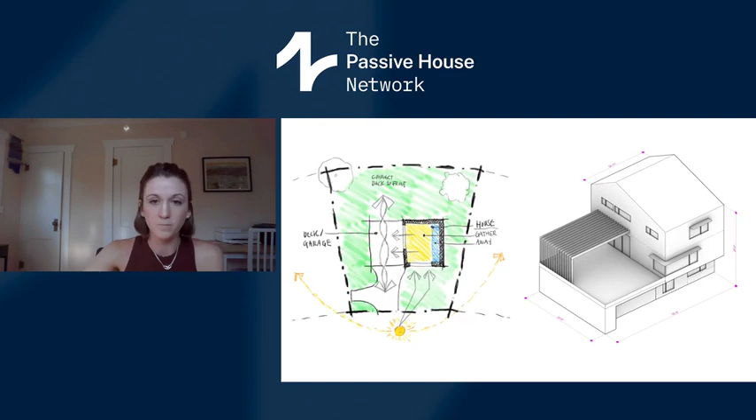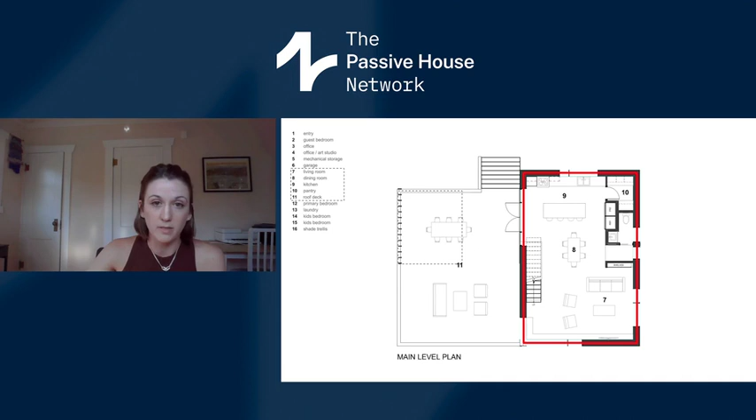This is the main level plan. This is the plan where that south and west facing glazing really comes into play. It allows heat to come into the main central area of the house in this open living, dining, kitchen space, and also provides access to the exterior here.

Okay, so one example of a collaboration that we had with BldgTyp when we were designing the windows, we discussed the layout with them, and they suggested that we make two changes to our design. One, they wanted us to reduce the north-facing windows by a tiny bit, just to reduce the energy loss through the north. And two, they made it a point that we needed to keep the west-facing trellis shade structure to reduce the amount of unwanted heat coming in through the west side.

And normally there's this push and pull between wanting to frame mountain views in these mountain towns, and then also placing windows strategically to optimize passive solar. But this project, I feel, is really unique in that its site was perfectly arranged to have both.

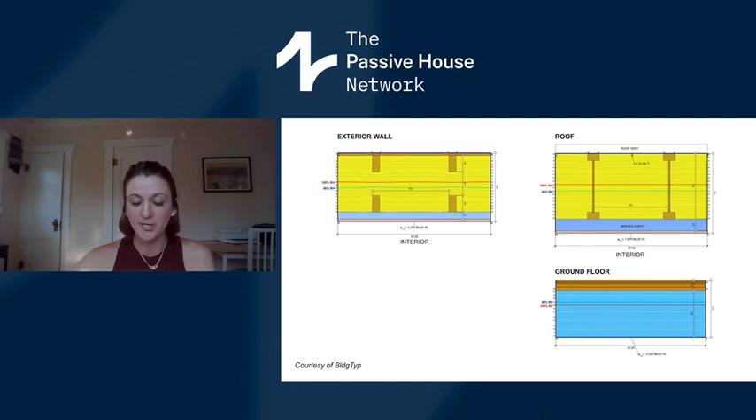And because the Louisville Building Department had never seen this before, they actually flagged it in our permit review, at which point our structural engineer, who is also well versed in passive house design, stepped in and advocated for it to get it approved, and it worked. We call it a slabless slab, and in addition to reducing material embodied carbon, it also has a higher R-value than a concrete slab, coming in at R43.7, but with a strength of 25 psi, it's plenty for supporting residential functions.

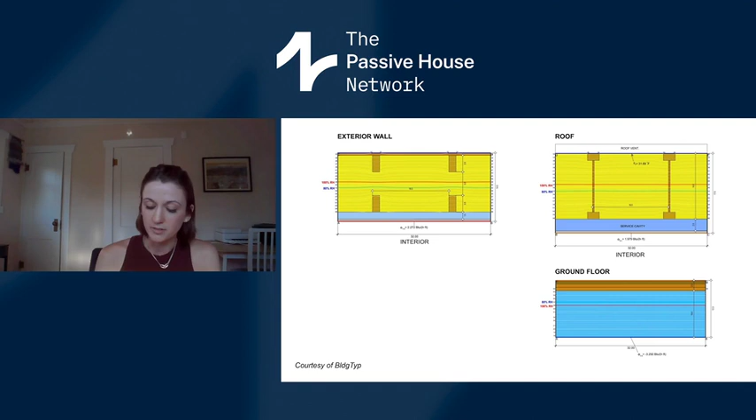So since this lot was constrained in size and the budget was tight, we opted to not pursue PHI Classic after we determined that it would add enough cost to sort of negate any increase in performance.

And then very quickly, before I hand it off to Frank, we had the challenge of detailing windows set in concrete, but in a way that would prevent thermal bridging. We originally had the window jamb set sort of horizontally in line with this concrete stem wall here, so the owners would actually have sort of a shelf on the interior.

But when we shared that detail with BldgTyp and they did an isotherm analysis, we learned it would be at risk for condensation. So after several discussions with both BldgTyp and Living Craft, talking about our options through the lens of what's actually buildable, we figured out that we could solve this issue fairly simply by just moving the window further in towards the insulation. And that's graphically represented by this isotherm.

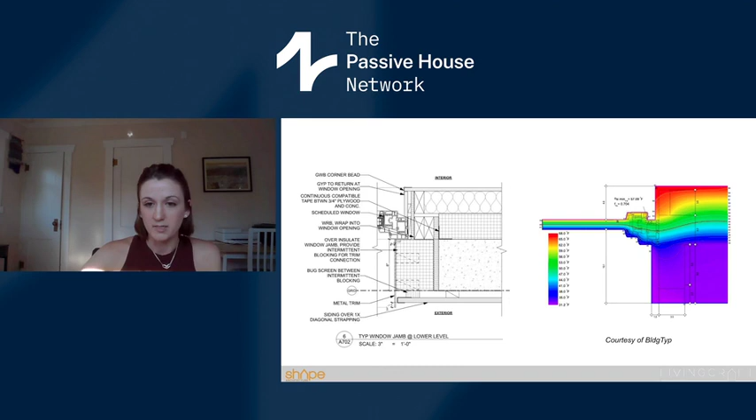And with that, I will go ahead and hand it over to Frank to present some of the lessons learned during construction. Thanks, Maggie.

Yeah, it's been a really great collaborative experience, and most of the lessons we're learning are similar to standard construction. It's just the details are so much more important, and first and foremost, it's having those meetings ahead of time.

In particular, something that I wish I had done a little bit earlier was getting the architect, engineer, passive house consultant, and builder all in the same room to run through the plans for an extended period of time, just because someone draws a detail slightly different than someone else, and then in the field, we have to figure out what's buildable. So spending a little more time on that, I wish I'd done that.

But so far, things have gone well, and when we do run into questions, those RFIs turn around pretty quick. One thing that we did as builders was we started marking up the drawings just to wrap our minds around it, and also so that we can relay some of this information back to the designers and the passive house consultant, and also to share that information with a lot of our subs.

And that's another thing that was even more important on these types of projects: getting your trade partners through early and figuring out where are we going to put that radon stack? Where are we going to put the vent through the roof? How are we going to run our line set? How are we going to air seal all these penetrations for the ERV or hose bibs or whatever they may be? Figuring out all those things early and getting them on board for this whole really tight envelope idea was really critical, and finding people who are open-minded to that was also really critical.

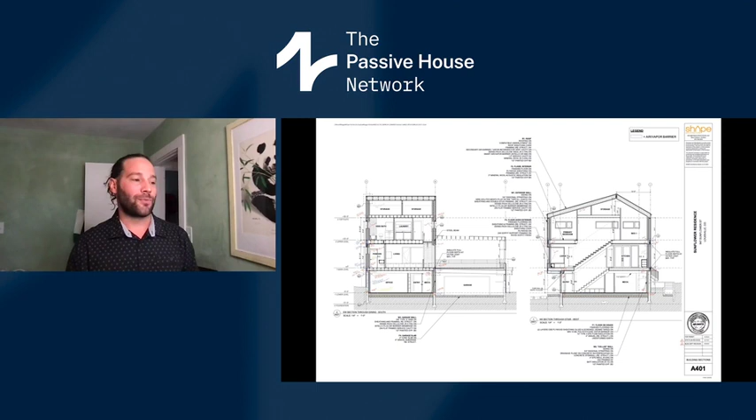So this slide is just where I went through and marked up all the details, all the different products I was using. I also met with the supplier; they're kind of like an air sealing consultant as well. I used 475 Building Supply for that, so they helped me develop this. I met with the framer, we revised it even further. And then when you get into the field, a few of these details change as well.

But even so, then you get in the field and you're like, oh, how would I actually fold this thing to connect this other thing? And so it's always a little tricky, but so far we've done well with it.

For a lot of our goal with this was kind of trying to do more of a low carbon build. And so anytime we can avoid some of the higher embodied energy materials like spray foam, we did. So most of this above grade is dense packed cellulose. So for that, we did a double stud wall with service cavity, as Maggie mentioned.

And so we're using a lot of membranes, a lot of tapes. And so the details are a little tricky sometimes and take a little time. And so something else I would definitely recommend if someone is new to this is whatever you think your air sealing numbers are going to be, increase them. And then whatever your material takeoffs you think you're going to do, like order more tape. Because there's always things that you're like, oh, I should tape that too.

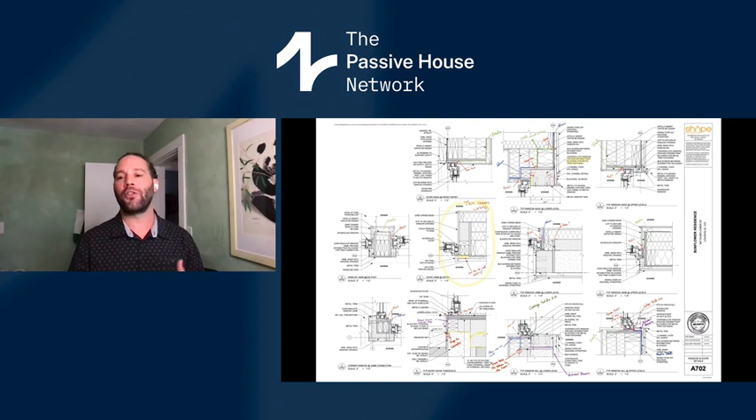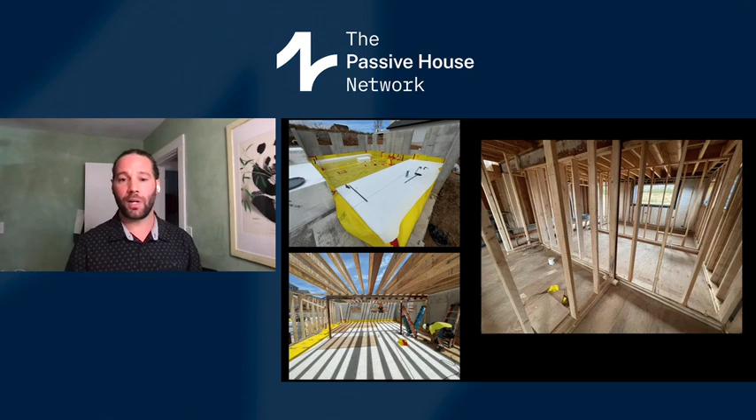And now it feels really solid, pretty level. And so it should work out well. It's new for us, but I've always wanted to do it. So that vapor barrier wraps up and connects to the inside of that foil-faced foam. And that foil-faced foam is now our air barrier to the interior. That's 4 inches of foam directly on the concrete.

We insulated to the interior of the concrete for various reasons that I won't get into, but you can kind of see that with the window bucks. And then in that top left photo on the right side, it's that same wall on the bottom, which is a double stud wall that is on the same wall as the garage. So we kind of have a little bit of a transition there.

You can see the double stud wall on the right side, that's 12 inches. You can see that blue tape is kind of wrapped underneath the 2x6 wall, which is our structural wall. That's all just kind of connecting the air barrier at every lap. So the details on this project are a little funky because we're trying to do it foam free.

And so when you have a cathedral ceiling, but you want to do dense packed cellulose and you are worried about condensation, you kind of go about it 2 ways. And we did basically both of those ways, which is you have a really robust interior air barrier so that in theory, you don't ever have warm, humid air getting to your exterior sheathing and condensing there. Or you can vent to the exterior. And that's basically what we did.

So we have an air barrier to the underside of the TJIs, which you'll see in the next photo. But essentially, just imagine you have your cathedral ceiling, air barrier underneath them, and then on top of that, we have this Mento, which is doubling as the netting for the insulation, but also kind of like a WRB. And then there's a 1.5 inch vent above that, kind of like a rain screen that you would do on the exterior of your walls. And then your sheathing sits on top of that.

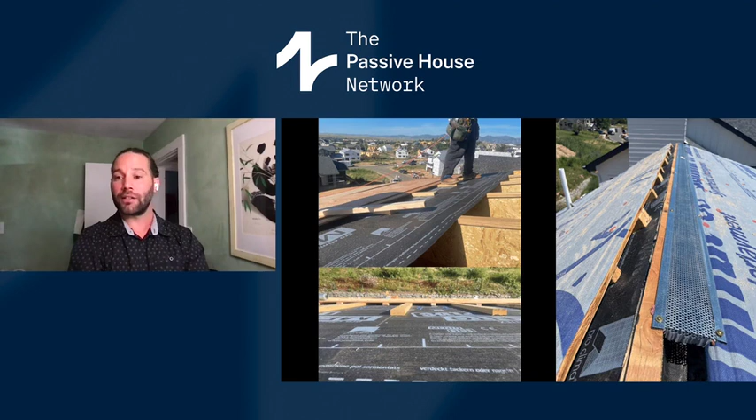But there's a lot of layers there. It's not the most straightforward solution. Granted, we're still doing this pretty cost competitively, so things were learned. It's still simple in terms of construction. It's just a lot of layers. And so you can see this is that third floor. That's the Intello on the bottom side of those TJI roof rafters.

We do a service cavity basically everywhere just to fish wires and have slim can lighting and switches, outlets, all that kind of stuff. Just to keep all those things to the inside of our air barrier. That way, the fewer times we have to poke through that, the better. The less taping we have to do, the less chance for failure. And the nice thing about Passive House low energy is we only have to get below 1. I'm hoping we get way below that, but I guess we'll see where it turns out.

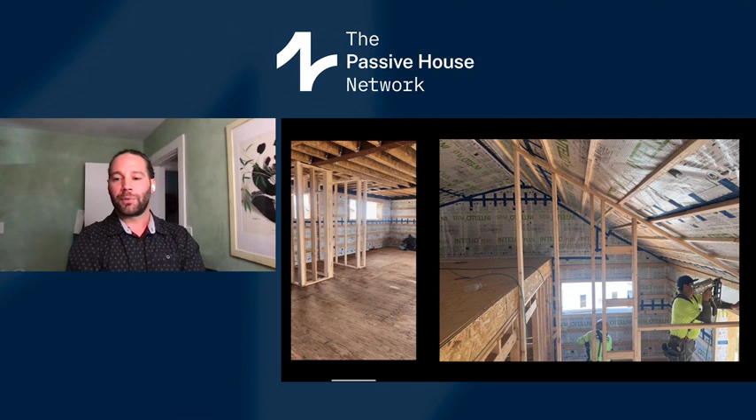We have windows coming in next week, and then we'll do a little preliminary blower door to see where we're at. And then the exterior is basically just wrapped with a WRB. It's a vapor variable WRB. It's Mento from 475. And then we're doing a vertical rain screen and metal siding. Again, the metal siding was another choice for a little bit of fire durability.

The one thing we learned on the vertical strapping: I had done diagonal strapping before, but for vertical, in order to land on your studs, you really need to stack your studs from floor to floor, which we did not do. So we ended up going back to the engineer and being like, what screw do I need to use and what spacing do I need to use if I'm not going to a stud? So things like that you learn along the way.

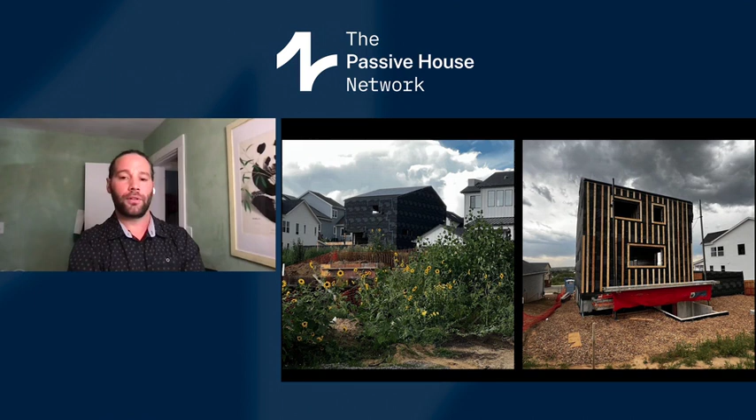You'll notice that the vertical battens, as they come up to the windows, are held off. That's just to allow air to move around as it goes up, that stack effect. And then we also have Vulcan vents at the bottom that act as the bug screen and fire screen, just to prevent any embers from going up through that vent and causing that chimney effect and bringing fire through. And that's kind of it.

I think from our point of view as a builder, our values really line up with the designers at Shape, Maggie, and then the clients as well. The high performance, the low carbon, the healthy materials, that's kind of our jam. And so this is a really great project for us. We're really excited about it. Ultimately, as on any project, we're worried about budget and performance and comfort, resilience, health, durability, all those things. And so I think that Passive House lends itself well to all those things. But having a good team, coming up with a good system is super important. So anyways, that's all I got.

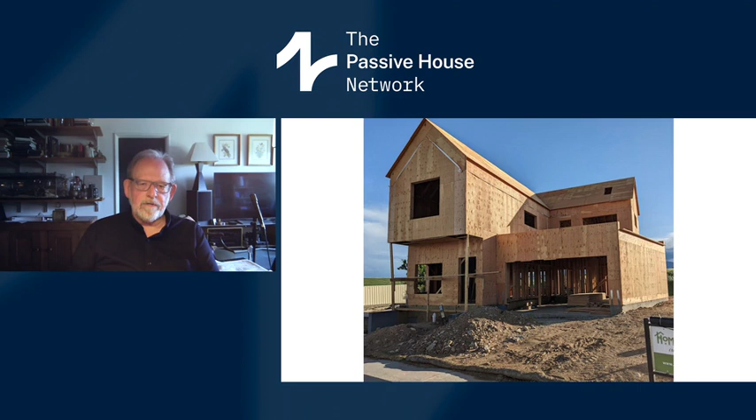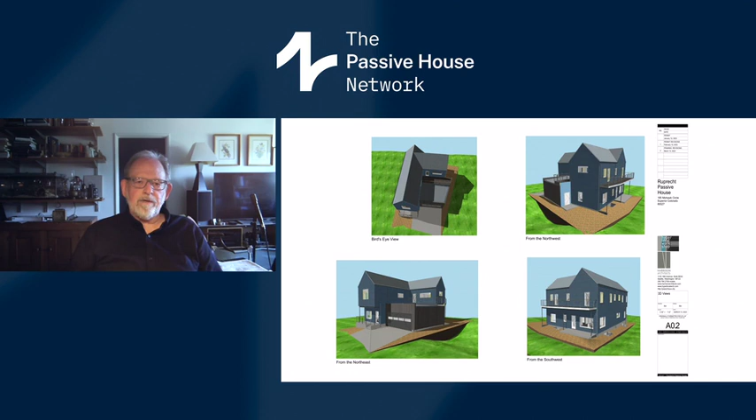I'm going to show a little of this, the ArchiCAD model. So we're basically looking at it with the siding that Peter and Michelle chose. So basically you can go to the plan. In this case, the north is up. This is east over here. There's another house on the north, another house on the south. So on the ground floor, it was a wedge-shaped lot, so we could expand the size of the garage a little bit. And this is unusual in that it has a basement as well, and then second floor.

Andrew and I worked really closely with Chuck through the design process to come up with systems that would be both economical and meet passive house. Like Sunflower, we're doing wood stud walls, except that we're doing 2x8s with 2 inches of mineral wool on the outside. The mineral wool was chosen because of its fire resistive properties, and then rain screen, and then fiber cement on top of that. And then a metal roof, which Chuck will speak to later.

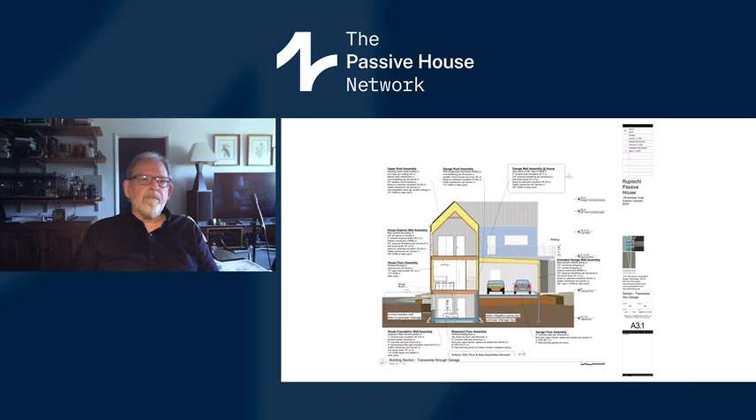So basically we've got blown-in cellulose in the walls here, and another thing that I looked really carefully at, might say obsessively, is the spacing of the studs, this is the advanced framing grid here, the stack framing, to make sure that they lined up from the foundation to the roof, and then the studs lining up with that too. Chuck suggested that we use deep floor joists, open web, to give us room to run the utilities and so on in the floor space of both the first and second floor.

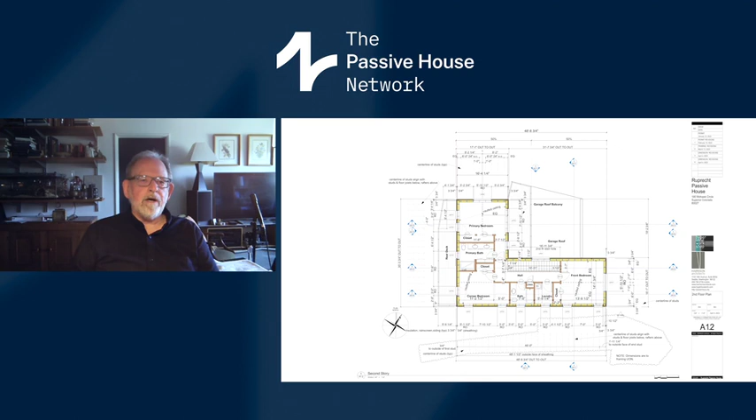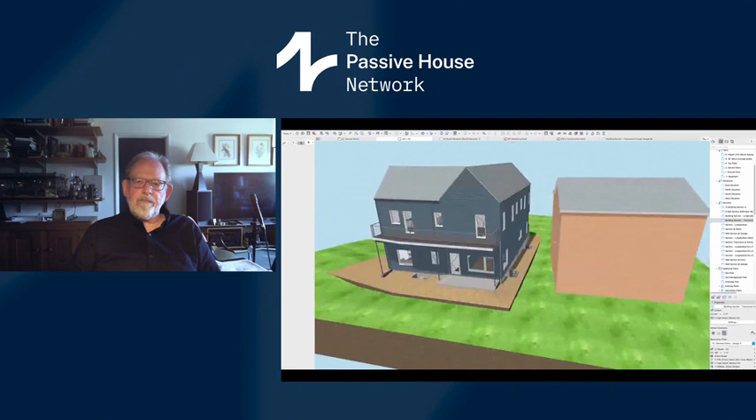Let's see what else. Go back to the 3D here. Like Sunflower, like most houses in the area, the view is to the west. So we partly mitigated the heat gain with a continuous deck off the west side of the structure. And we were lucky in this case that because of the pie-shaped lot, we had a little bit more space in between the two houses, so we could get some more glazing in on the south side. The north remains fairly low on windows, which is something that's different from what we need in Seattle.

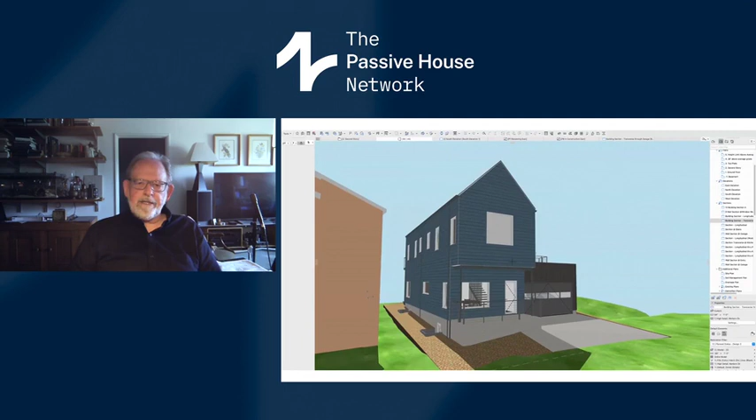I think I will turn it over to Chuck, and I can jump in if there are any other questions at the end. Thanks. Thanks, Rob. I think that's a pretty good high-level view of what we're trying to achieve.

The biggest challenge that we had going into this is that we wanted to check all the boxes, not only be passive house, but WUI compliant. So that drove a lot of our exterior materials. The decision was to try to have everything non-combustible outside of the WRB. And so all the decks are steel with aluminum deck boards, steel railings, cement siding, and standing seam metal roof on this. So that was the challenge. We also wanted, like Rob said, to introduce advanced framing to this, and at the same time, try to make it more affordable for clients that were coming up short on their insurance claim.

And so that was kind of a tall order. It took us months and months to finalize the plans. We're still value engineering out in the field and coming up with the best ways to do this. I did want to highlight that with the metal roof, and it's funny that Frank and Maggie went into this on their project.

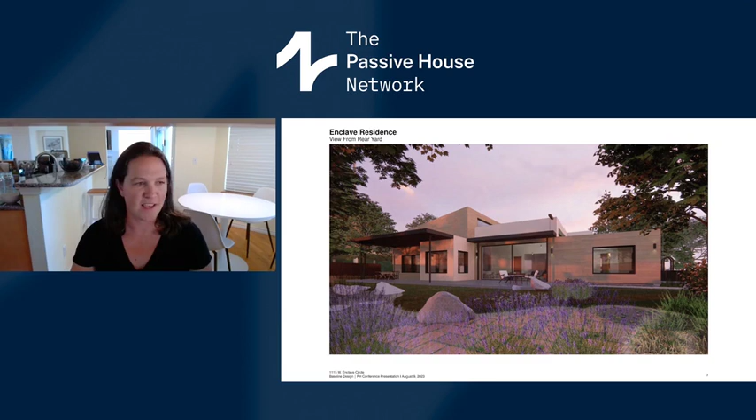And this is it from the rear yard. So behind us is Davidson Mesa, for anyone who's local and knows. And behind that, just unobstructed mountain views. So obviously the driving goal is to get big, huge, awesome views out the back. And then a few views inside, renders currently, but we're looking forward to when these will become photographs.

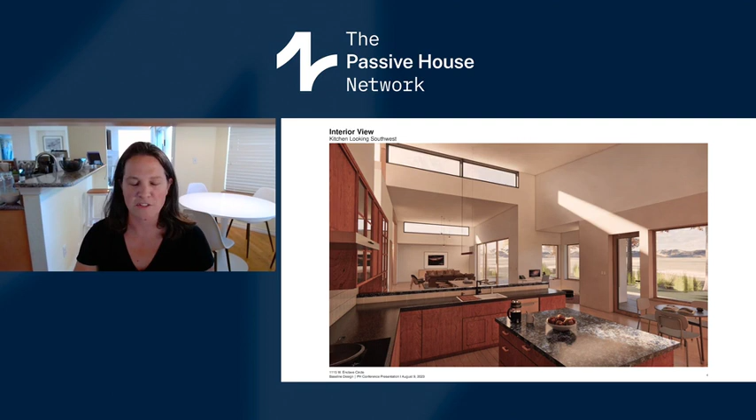So on the right-hand side, that's the view out to the west with the mountains. And then we also have this idea of these tiered southern clerestories to take advantage of southern light and just flood the house with lots of natural light. Just click through a few more views. This is the main entry.

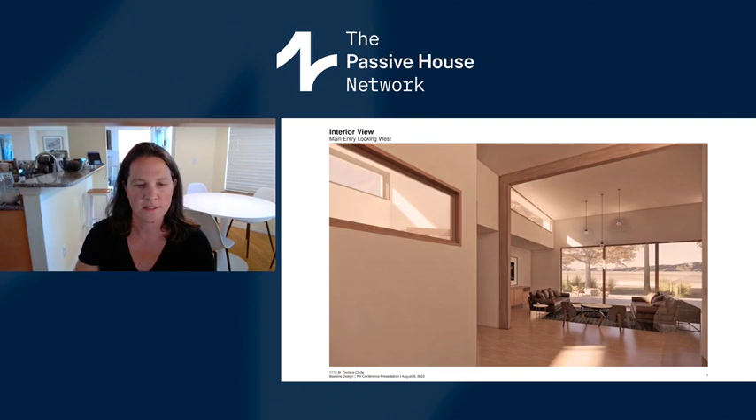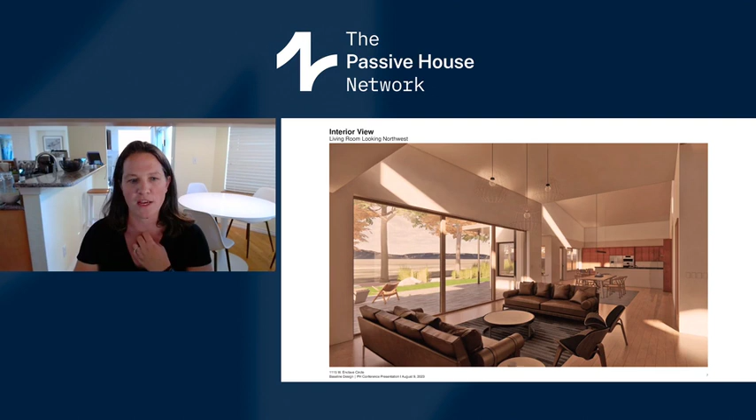So coming into the house and looking directly out the west. Coming in a mudroom door from the garage, through the house you get, again, an immediate western view. And then here the main open living space just from the other side. So living room, kitchen, dining.

So we thought we would pick a few specific design considerations. What do we have to do differently to design this house because it's passive? And then more specifically, talk about using a prefabricated system like B.Public, which is what we used. So the large 14-inch thick Lego blocks that come on site and go up really quick. We can tell you what we've learned and takeaways from that.

So I've had a lot of people ask, is there a lot more planning, more detailing, more coordination for a passive house? And I have not found that to be the case more than any other custom home, but I have found it to be much more front end loaded. So by the time this was going in for permit, it's really dialed in with all the players, from the details to the systems to everything.

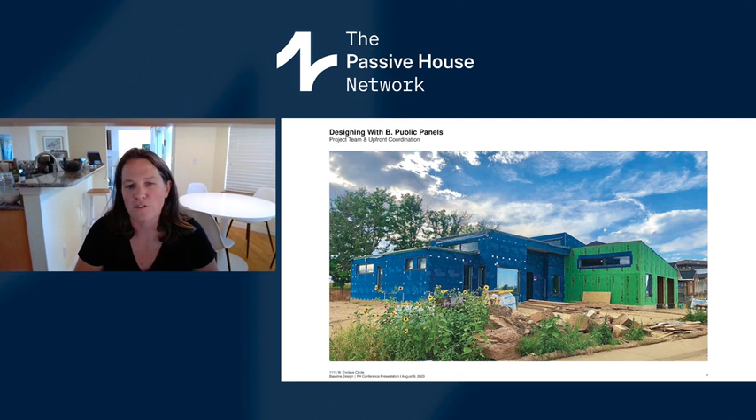And then the process of construction is much more execution of those than as much figuring out as I'm used to. So it's good. It's a good microcosm or good practice for any project. But I would say that for sure is one thing we've learned, just how crucial that front end coordination is. From getting a great team with lots of expertise and just caring about it and lots of passion, and then just getting that much farther along before you're starting construction.

And just generally, this is a diagram we did really early on showing the layers from the plan to the panel components in the middle and then the cladding on top. And I think what I'd say as a takeaway is we didn't feel limited by it. Going into it, I thought that we would. We thought there would be a fair amount of design concession for performance. And we really haven't found that to be the case.

It's a parameter for sure, but I would say the plan, which initially came right from the owners, is really close to what they wanted. All the light, all the windows, really close to what we would want to do anyway. So we feel super encouraged by that. And I think that's like a nice nugget to be able to pass along to people thinking of doing it. This doesn't box you in or limit you, just changes a little bit how you think about it.

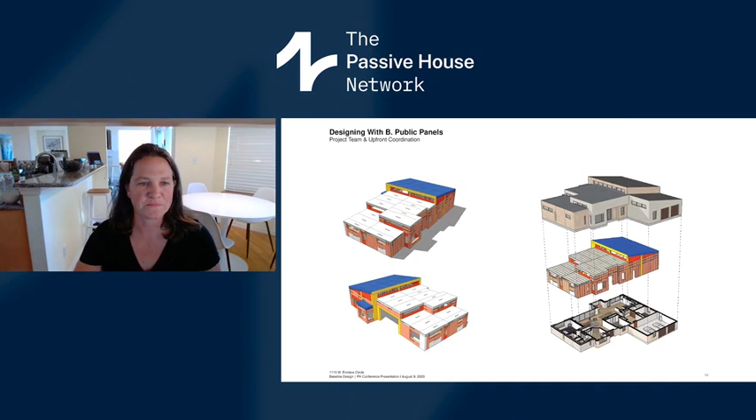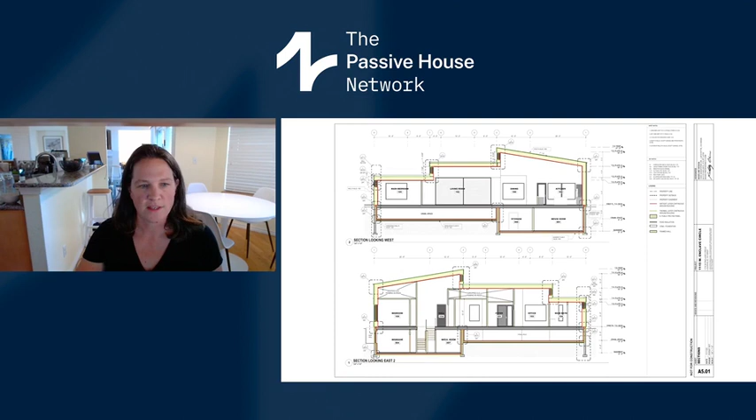You could take any number of other considerations and sort of do a presentation about it, but I thought I would just show this example, which is planning for windows. So specifically with the B. Public system, there's several ways to do it. When we started, we thought, okay, they have a standard set of panels with standard sizes, and you pick from that, so that might potentially be limiting, and we really didn't find that to be the case.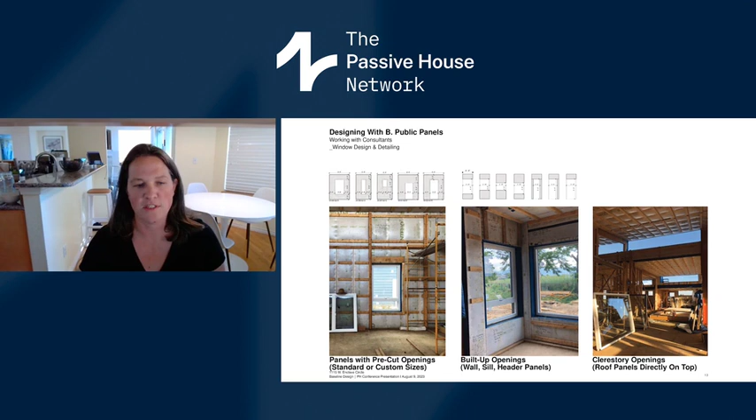One other window condition. This is our largest window out to the west. It's 20 feet wide, 9+ feet tall, lift and slide. So this is yet one other way to kind of work within the panel system. The B. Public panels themselves, the opening is oversized. So it's the line here at the very top of this header, and then several extra inches on either side as well. That was for a few reasons.

One, we were still cycling through window systems and pricing them out, and different manufacturers have different maximum heights, so we didn't know exactly what we'd be using yet. So that's just a nice example of, as much as you need to get everything set early on, if you have a certain variable that isn't determined yet, you can find ways to work around it.

And second, it helped us with some detailing. So at the top, we're going to want to have a concealed shade pocket there, and it just sort of let us get some alignments and some finished detailing that we wanted to do. So one cool thing about this system is it's the whole envelope, but you can build in flexibility where you want it.

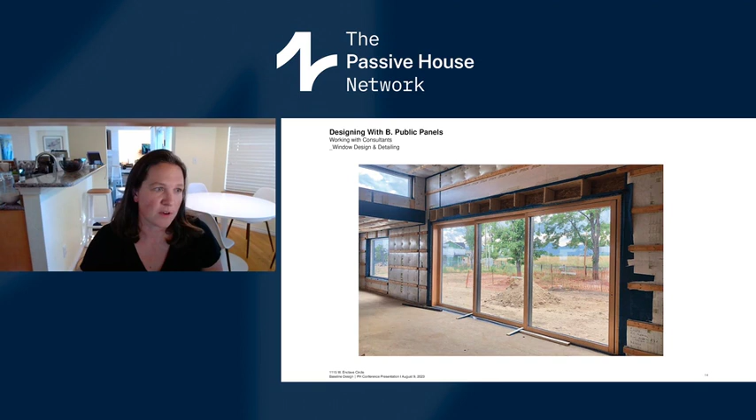So I thought the window design on this project is just kind of a good example in general of how I feel about this process, which is something that might feel really limiting and come with certain parameters at the start. Actually, if you're creative with it and use it in different ways, you can really kind of design around it and work it to your advantage. And we didn't feel like we didn't get to do what we wanted to do.

Then I'll share one more example of kind of design considerations specific to Passive House and specific to B. Public. And this one is in the same vein of working with everyone early. Working with the jurisdiction early was super important. So we found Louisville to be wonderful. They were really open to Passive House and to kind of changing the way they're used to reviewing.

But I'm sure that some jurisdictions would have a harder time with it because it is really different than things they're used to seeing. The standard manuals, JDS, really don't apply to lots of things. So getting in front of them early and often for kind of pre-submittal reviews, if that's possible, is something that we found to be really helpful, and I would definitely encourage anyone doing a Passive House to do.

This specific example is just showing that, of course, with really thick 14-inch walls, you have a larger footprint. So this is our site plan, and this is a diagram showing that we really built out to the full extent of our setbacks. And that was even with Louisville providing a Marshall Fire rebuild setback variance where they let you bump out 10%.

So my kind of takeaway or look ahead from that would be, to any extent that we all have opportunity to talk to jurisdictions, I could see a version of like a Passive House setback variance, that if you're going over a certain thickness of wall, you should be allowed to kind of bump into those a little bit.

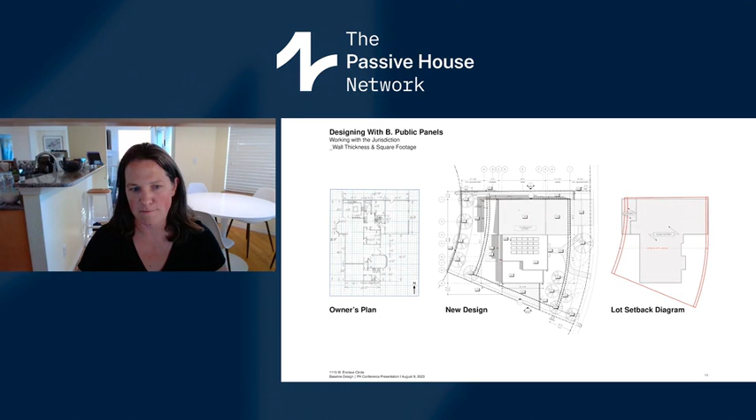This is a pretty big lot and we were able to fit, but there's a lot of scenarios where you're really tied up against those constraints. And I could see that being something that tipped the threshold that someone wouldn't want to necessarily do this. So it worked out, but again, just working with the jurisdiction super early, working with all consultants really early was something that we found to be really helpful.

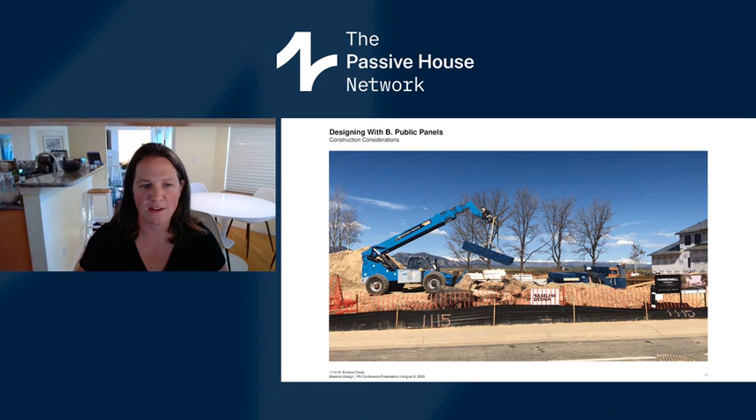So then we can show a little bit about some of the construction. And Mark, I can flip through these and let you speak to construction considerations and things we did and things we've learned and whatever else you want to share.

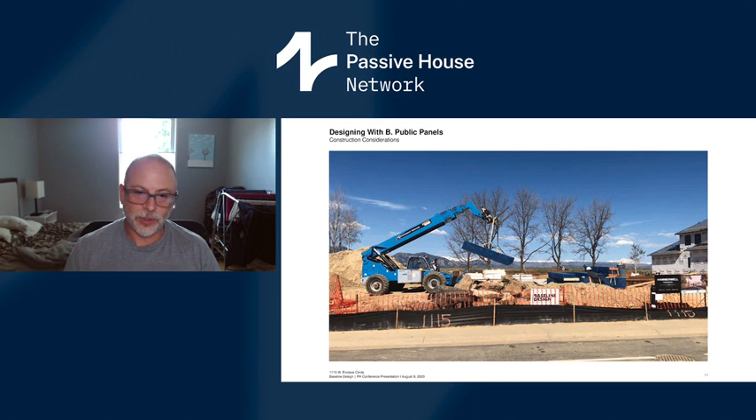So the one thing that we really liked about panelization was that each unit is self-contained. We know it has the proper insulation values. We know it's already an airtight unit in and of itself. And then when those panels come together, which Kim, I believe we have on our next slide, we can see some of those. When those panels come together, there's actual obvious places where you need to air seal.

So it makes it simpler for our crews who maybe aren't used to the air sealing process. We just have to point out the fact there's a seam, some tape needs to go there. One of the things that we did need to figure out is exactly how we were going to transition from our foundation to the panels, particularly from an air sealing point of view. So that is one of the things that we worked on with Kim and with Steve Mann specifically.

And really, what it became was a very simple process of draping over some air sealing material. In this case, we used Intello. It's kind of hard to see on this slide, but we draped it over the top of our plates, and then that allowed us to tie that into the foundation walls, and then we could flip it up and then tape it to the outside of the panel and give us a really nice air sealed joint.

Right now, the material is there. We haven't finalized our taping along that particular seam, but we have all of the outside of the building taped, and we have begun to tape all the inside of the building, with the goal of doing our preliminary blower door test next Friday. As you saw in previous pictures, we already have windows installed.

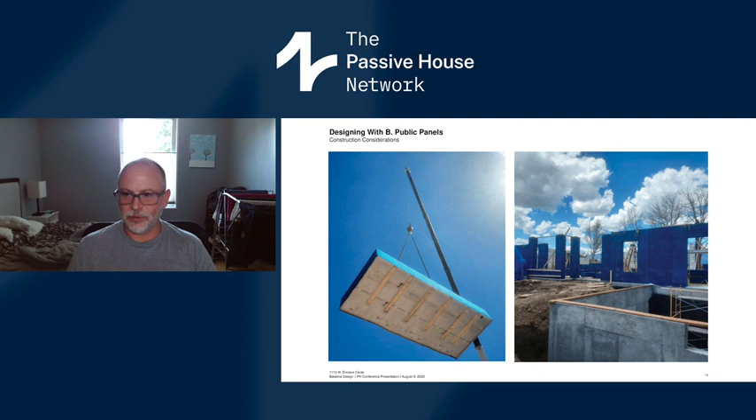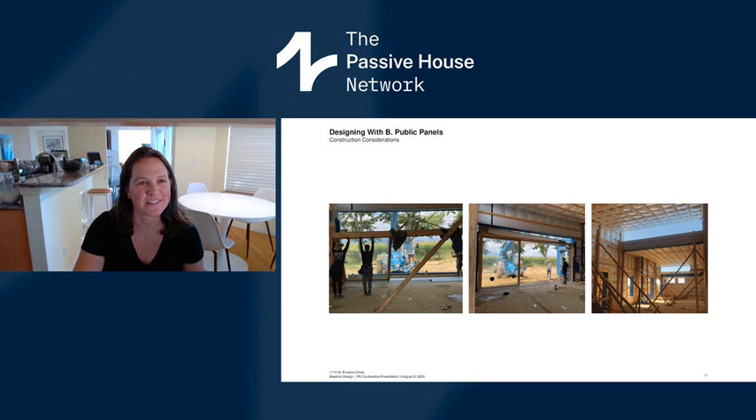Oh, and Kim is giving me another one to talk about. You don't have to.

This is just some construction photos. So you'll notice here, you'll see those clips that are long. So everywhere where you see those clips, there's a seam. And at that front there, you can see that there's actually 4 pieces that make up that wall around the windows. Actually, more than that, because we're stacked on top of that. So we have a sill piece, 2 jamb pieces, and a header piece, and then our stack up beyond that. And each one of those clips is required per the engineer.

And this photo was taken, I don't know, when was this photo taken, Kim? This is probably a week at least ago. Okay, so it's all taped. We should be pretty close to having all those clips in within the next couple of weeks, and ready to move on for a framing inspection soon after.

And with that, I think we're done. I think the last thing that I would say is that, concurring with everybody else here on the panel, having the team together and collaborating up front and working through all those details, I think it really helps your construction team to really understand how things are supposed to come together, and it just makes them more hyper aware